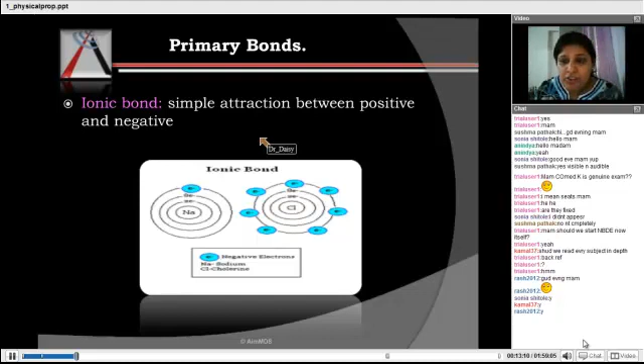Okay. So that is ionic bond. Now coming to the second type of primary bond, the covalent bond. I have already told that any atom is stable only if there are 8 electrons in its outer shell. If you see 2 chlorine atoms, both have 7 electrons in their outer shell. So both are not ready to give an electron because both want 1 more electron to make 8. So what should these 2 chlorine atoms do?

They can share. One is contributed by this atom, one will be contributed by this atom, and these are the shared electrons. So if you count like this, it is 8 for this atom, and count like this, it is 8 for this atom. So sharing of electrons to complete 8 electrons in the outermost shell forms the covalent bond. As these two atoms are sharing, it's very difficult to separate them. That's why covalent bonds are very, very strong primary bonds.

Now coming to the next type of primary bond, the metallic bond. This kind of bond usually exists in metals. That's why the name is metallic bond. In metals, if you see a group of atoms, the electrons don't usually reside surrounding one central ion. Mostly there are central positive ions, and there will be an electron cloud around. So the outermost electrons will be free, surrounding the ions.

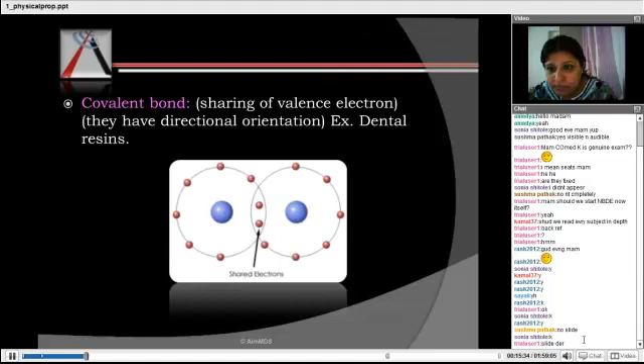No slide? Okay, just a minute. Sushma, can you see the slide now? Kamal, I'll repeat the metallic bond. Okay, Sushma, fine.

So what is metallic bond? In metals, meaning silver, gold, platinum, an atom doesn't exist with the central positive part and its electrons around it. Usually when there's a group of atoms, there will be central positive charges and the outer electrons will be freely moving here and there. So if you see the structure, it will not be a single atom defined like this. Just a minute. So it will not be a single atom defined like this.

So usually there will be central ions and so many electrons around, electrons of this atom, this atom, this atom, all around forming a cloud. So the picture will be like so many central positive ions and so many electrons surrounding them like a cloud. All this cloud will be attracted towards all the positive ions. So that is metallic bond. Kamal, is it clear to you?

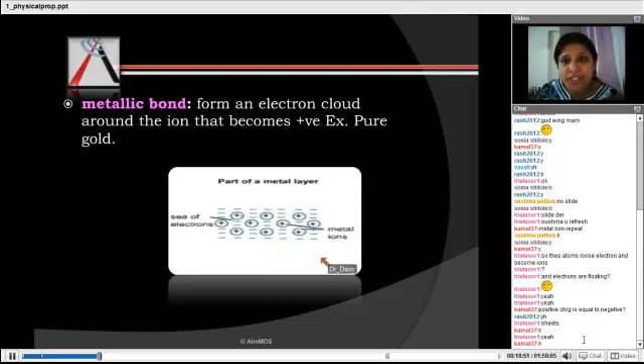So because of this, it can be drawn into sheets, that is malleability and ductility, because of this kind of structure. And it's a good conductor of heat and electricity because of these metallic bonds. Okay.

Then coming to the secondary bonds. Secondary bonds are not as strong as the primary bonds, but these are very important bonds. The first example is the hydrogen bond. So what do you mean by hydrogen bond? If you remember water, in water it is HOH. HOH is the H2O we call it, or HOH, right?

H2O, if you remember, this is H, here is O, and here is H again, right? So this is the structure of water. Because of the different sizes of the atom, oxygen is bigger, H is small. There is a polarity on this molecule. This molecule is polar.

That's why it slightly attracts the next molecule of water, and there will be hydrogen bonding between it. So that is known as hydrogen bonding. You see the structure because of the disparity in the sizes of atom, oxygen and hydrogen. This is a little more negatively charged oxygen pole, and the hydrogen pole is a little positive charge.

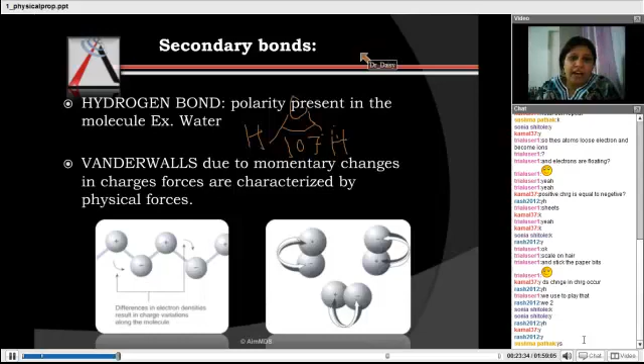Bonds are clear to everyone, I hope. Rashmi, Kamal, Sushma, Sayyad, Saili. Clear? So, shall I move ahead? Next is adhesion and cohesion. Sorry. I want this slide, okay.

So next is adhesion and cohesion. What is adhesion? When the two substances are brought into close contact, molecules adhere with each other. Molecules attract each other and adhere with each other. So when this kind of attraction and adherence is between unlike molecules, it is adhesion, and when it is between the same kind of molecules, it is cohesion. Adhesion when they are unlike molecules, cohesion when these are between two like molecules. Clear? Unlike molecules adhesion, like molecules cohesion.

When we place an upper denture, there is a thin film of saliva between the palate and the denture. That thin film of saliva is responsible for that adherence. So one side is saliva, the other side is denture. So that is adhesion. Adhesion is unlike molecules, cohesion is like molecules.

Two surfaces coming in contact and attracting each other and getting adhered to each other. When these are unlike, then it is adhesion. When these are like, it is cohesion. You should be very clear about this. So the material or film used to cause adhesion is known as adhesive.

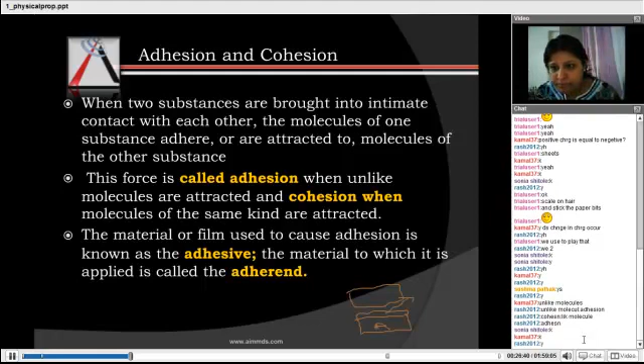Then coming to surface energy. When I talk about surface energy, from where comes this surface energy actually? So just try to understand the concept. This is the one diagram here, in which it's a piece of a material or matter where there are so many atoms or molecules. If this is the innermost atom, this part shown is an atom or molecule which is present very much inside of that matter. So which is present in the center or inside, it will be attracted by all the atoms equally.

Kamal, no audio. Okay, Kamal, you refresh once. Kamal, is it okay? Kamal, is it okay with you?

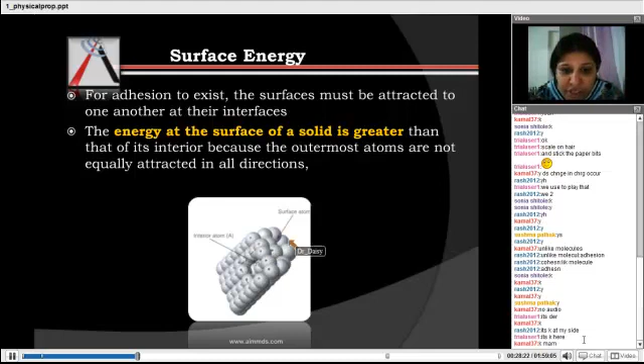Okay, fine. So we were talking about surface energy. The atom or molecule which is present inside, not on the surface, will be attracted from equal sides by other molecules. So its forces or its energy is balanced there. But these molecules which are present on the surface of a matter are only getting attracted from one side, and their surface is free. There are no molecules on the surface to attract them. That's why the energy is high on the surface. So this energy is known as surface energy. So Saili, Syed, Sushma, is it clear to everyone what is surface energy? Okay. Fine.

So what is surface tension now? Increase in energy per unit area. An example for surface tension is if there is one balloon and you blow that balloon, there is increase in area. As there is an increase in area, there is increase in surface energy also, because the surface is increased. As there is increase in surface area, definitely surface energy is also increased. That increase in energy per unit area is surface tension. When the balloon is stretched and you blow it, it is in tension. That is surface tension.

Then a soap film contracts and drop of liquid. One more thing: in this universe, every matter tries to be at the lowest level of energy. Every matter tries to lose energy and be at the lowest level of energy. So how is it possible? It's possible only in the sphere form. For the same volume, there is a rhomboid form, a cuboidal form, a sphere form. Only in the sphere form is the surface area less. When the surface area is less, surface energy is less.

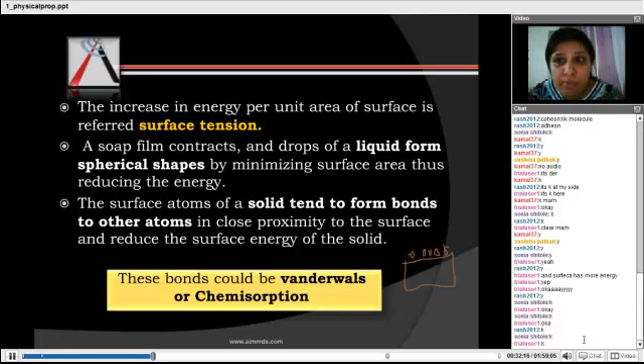Coming to the next topic, that is wettability. So what is wettability? If you put a drop of water on different things, like on plastic or on glass, it has different behaviors. It may not wet the surface, or it may wet the surface.

The better example is mercury. If you put a drop of mercury on a glass slab, it will not form a layer on it, it will get rolled out. If you put a drop of water, it will spread in a better way. So why do few liquids spread on a surface while others tend to form spherical drops? This is related to a property known as wettability.

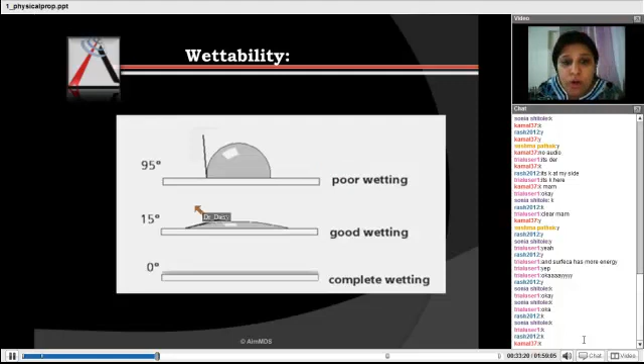So what is wettability? Between a solid and a liquid surface, this is the angle formed. Whatever sphere is formed, if you draw a tangent to it, that angle is considered. If it is more, then wetting is poor. As this angle decreases between the liquid and solid surface, the wettability is improving, it is spreading out. At 0 degree angle, it's completely wetting the surface.

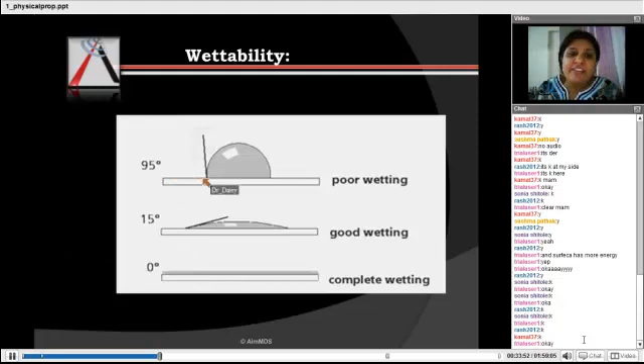So from the MCQ point of view, wettability is best when the angle between solid and liquid surface is 0 degrees. Best wettability is at 0 degrees. It decreases with increase in angle. If this angle is more, wettability is poor. Clear?

So coming to the next part, stress. I hope till here everything is clear to you - Saili, Syed, Sushma, Rashmi, Kamal, everyone. Yes Rashmi, when the angle is 0 degree, it means complete wetting, good wetting. As this angle increases, wettability decreases.

Fine, so I'll continue with the next important property, that is stress. Stress is the force per unit area. So what is force per unit area? Suppose this is one box. If I press it from top, from here, that is the force I am putting on it. Force per unit area is pressure.

So when I am putting force on it, there must be something happening in reaction to that inside this material. Then I am applying that force, and in reaction to that, something will happen in this material. That reaction is stress. Again it is force per unit area, but this is internal reaction to the external force. So this is not force, be very clear about this.

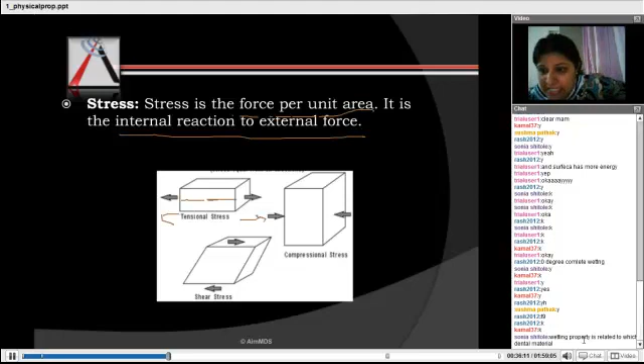Sonia asks, wetting property is related to which dental material? It is related to all dental materials, everything has a good or bad wetting property. Now if you are asking this because of mercury, it's because mercury is very difficult to handle due to poor wetting property. When you handle mercury, it forms little drops, very difficult to handle. So that is because of poor wetting property. That's one application of wetting property with mercury, otherwise wetting is related everywhere.

If I put a drop of water on wood, how much it spreads depends upon the wettability, the angle between the wood and the water droplet. If I put a drop on glass, it's actually related to everything like this. But mainly, mercury has very poor wetting properties, that's why its handling is difficult.

Okay Sonia, fine? So we were talking about stress. When stress is in the same line but in opposite direction, then it is known as tensional stress, that is stretching. So these are the MCQs, be very careful about the definitions, about what actually is tensional stress.

Compare it with compressional stress. If you compare, these two side forces, these two directions of stress, again these forces are in the same line but in opposite direction. Direction of this is this side and direction of that is this side. So when it is in opposite direction but in the same line, that means it is compressional stress.

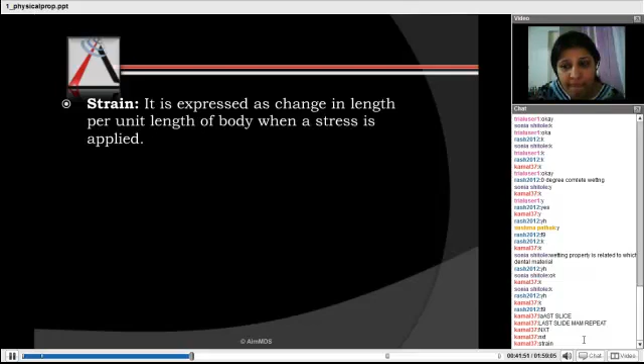There are a few other things which we should know, so please be a little attentive. If we draw a stress strain curve, then what will happen? With some amount of stress, some strain is there, then more stress, more strain, more stress, more strain, meaning more force, more change in dimension. If we take the example of a wire, suppose a steel wire, if we try to stretch it, pull it, to some extent it gets pulled and it will come back to its original position. Till then stress is proportional to strain, meaning you are putting a particular amount of stress and an equal amount, a particular amount of strain is there. Further, more stress, same amount of strain. Same amount of stress, same amount of strain. So that's the proportional thing.

So that is the proportional limit. So if you take the example of a steel wire and try to pull it, then you try to pull it to some extent. When you are pulling it slightly, then a little more harder.

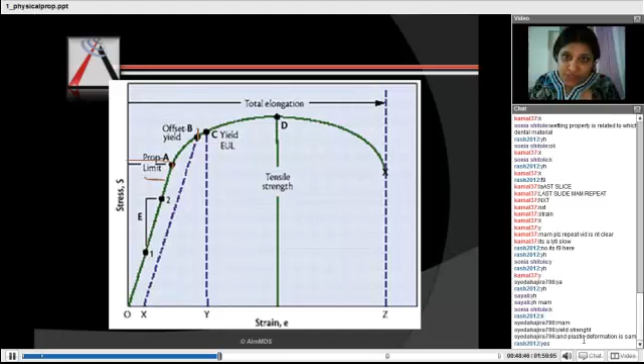At the point of yield strength, plastic deformation begins. Sayyid, is it clear to you?

Okay, so I'll just go again with this. So what is proportional limit? I'll go again to this - maximum stress above which strain is no longer proportional to stress. So till it is proportional, it is the proportional limit. Till it is elastic, it is the elastic limit.

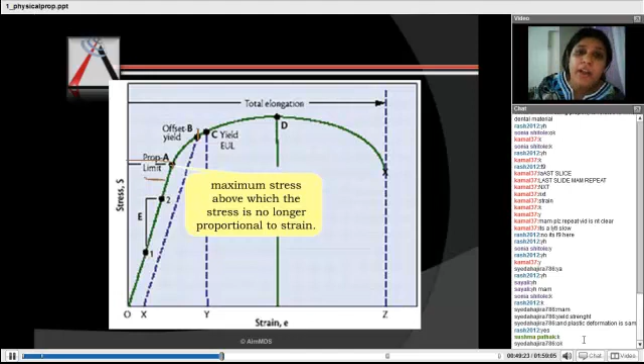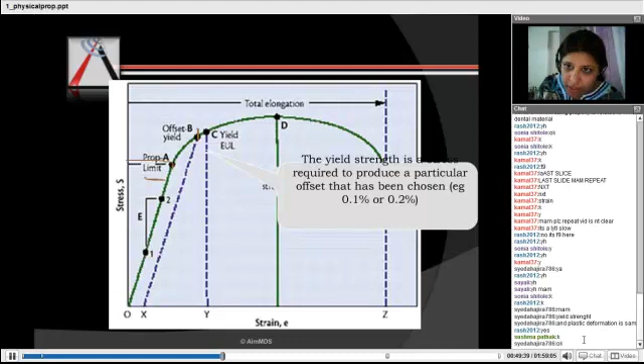When it is not, then it becomes plastic. So what is yield strength here? Yield strength is stress required to produce a particular offset that has been chosen. Okay, so we'll go to the next slide and see how much you have understood this.

Can you all see this box? Yellow box? Okay, so I'll read this and it should be clear to you.

Elastic limit, proportional limit and yield strength have very close values. If you see, elastic limit and proportional limit are identical. Definitely, at the point in which it's elastic, the stress is proportional to strain. So elastic limit and proportional limit are the same, identical.

But yield strength is slightly greater because we have already considered a 0.1 to 0.2% offset. This means the deformation has already happened by 0.1% or 0.2%. So it should be a little higher than the proportional limit, right? So yield strength is generally greater than the proportional limit, a little greater, because of an offset that is chosen rather than measuring the slightest deviation.

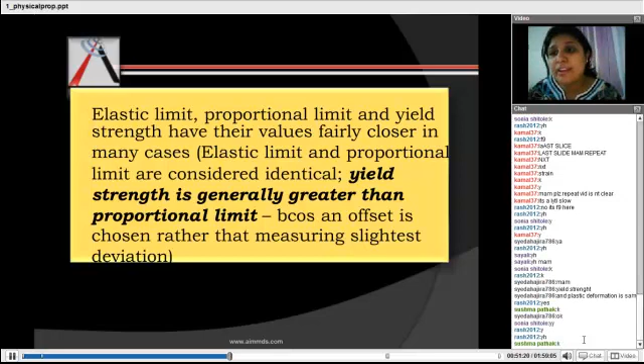So because of the offset which we have chosen. So if these MCQs come, all these things, elastic limit, proportional limit and yield strength, are they the same? Yes, they are nearly the same. But if an MCQ is framed asking which has a little higher value as compared to the others, it is yield strength. So approximately these three are the same, but yield strength has a slightly higher value. I hope this is very clear to you because so many MCQs are there on this. I want this to be clear to everyone, okay?

So here, one thing more I'd like to describe, that is ultimate tensile strength. What is ultimate tensile strength? When we are pulling the wire, it is coming back to its original position. Then we are pulling the wire, it is not coming back to its original position. Its dimension is changing. When you keep on pulling, it breaks. That stress where it breaks is ultimate tensile stress. So what is ultimate tensile strength? Where it breaks, that is ultimate tensile strength. Is it clear to everyone? Okay.

So next is, what is resilience? Resilience is a measure of energy. Again, it's a very important MCQ question. It is the amount of energy. How? When you stretch a wire and leave it, during stretching, how much energy does it absorb? That is resilience. In technical language, it is the area under the elastic region of the curve.

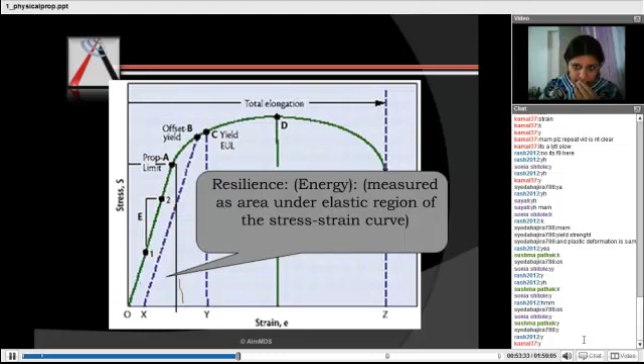Next is, what is toughness? Toughness is another measure of energy. It is the energy required to fracture a material, in other words, it is the resistance to fracture. Means how long a material can resist its fracture, its breaking down. So this is how it is measured: it is the total area under the stress-strain curve.

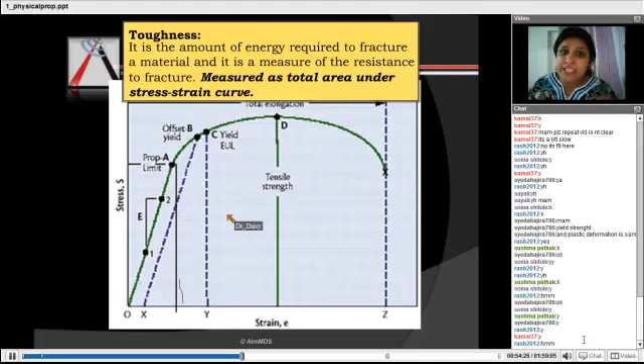Total area means जब तक तुमने खींच के उसको तोड़ नहीं दिया, you are pulling the wire, it's coming back, pulling, not coming back, pulling, and finally it's broken. The whole area under the curve, that is the total energy absorbed before getting fractured, that is toughness. Clear? So what is resilience? What is toughness? Hopefully it is clear to you. There is something more called Poisson's ratio. So I'll go to the next diagram for this.

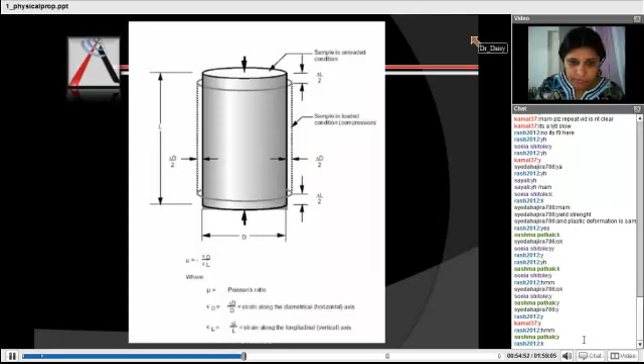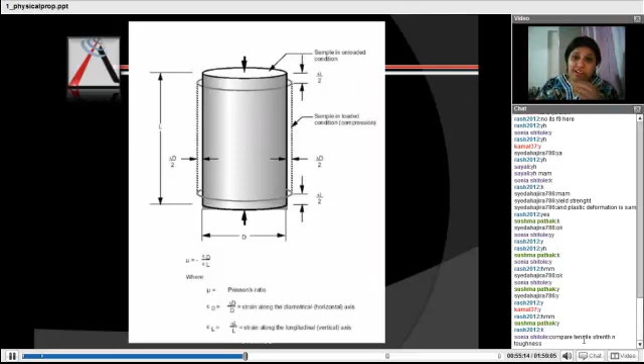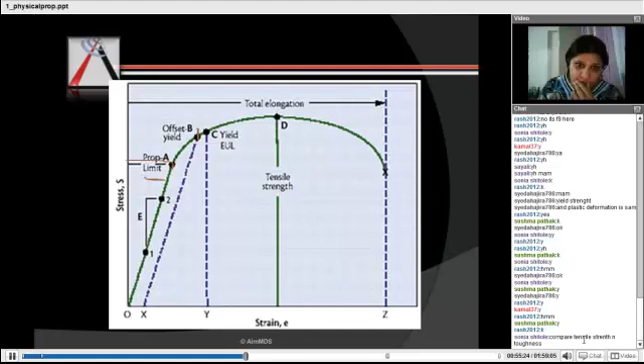This is one cylinder. It is a metal or a rubber or something. When you put any kind of stress on this... here's tensile strength and toughness. Ultimate tensile strength: till ultimate tensile strength, the energy absorbed by the wire. Ultimate tensile strength is when, because of stretching, the wire breaks. Till that point, the energy absorbed is the toughness.

So it's the resistance to fracture, how much energy is absorbed before fracturing, or how much resistance it has given to fracture. It's the same thing to say. Got it? Sonia, the ultimate tensile strength is the last point of the stress-strain curve. उसके आगे तो break ही हो जाता है. So toughness is the total area under that curve up to where it breaks. No, it's not the same. Definitely it's not the same. Tensile strength is stress, toughness is energy.

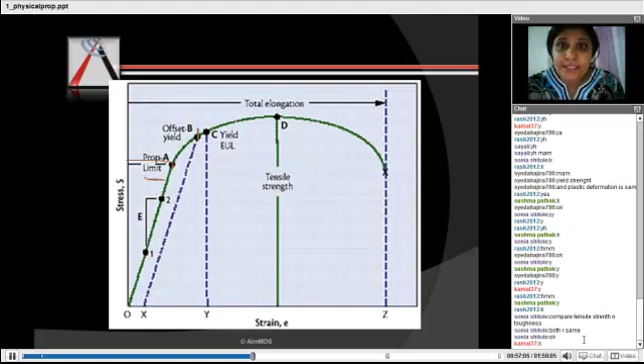You're not getting my point, Sonia. Just try to understand what I'm saying. Ultimate tensile strength is the stress which can cause breakage of the wire. So it is stress. During that pulling, how much energy is absorbed by that wire? That is toughness. The two things are different. Yeah, these are very much related, but these are not the same. So, tensile strength is stress to break. Toughness is energy absorbed before breaking. Sonia, is it really clear to you? Okay.

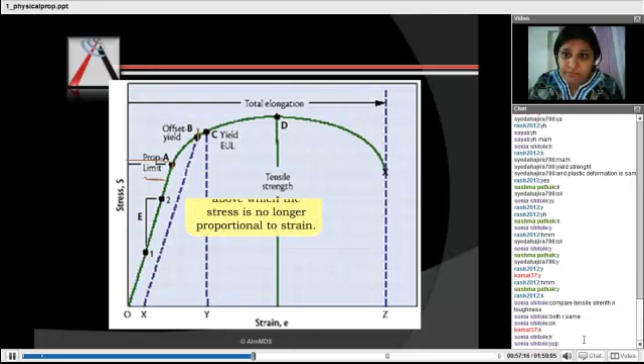Actually, I know you really need to put your brains to understand these definitions, but these are the basics of dental materials, and afterwards these properties will be used many times while defining the materials. So what is Poisson's ratio? When you put a stress over there, there is a strain in all the directions.

Okay. Sorry, my slide is not working. We need to wait for a minute, I think.

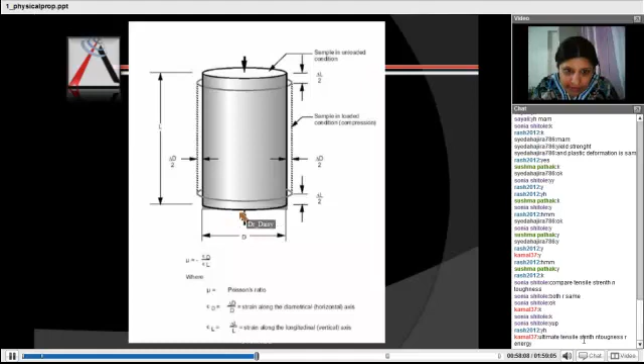Okay. So there is simultaneous axial and lateral strain. Suppose we compress this cylinder. This is the original dimensions of cylinder. We compressed it. There is strain in both directions. See, there is change in length also. There is change in width also.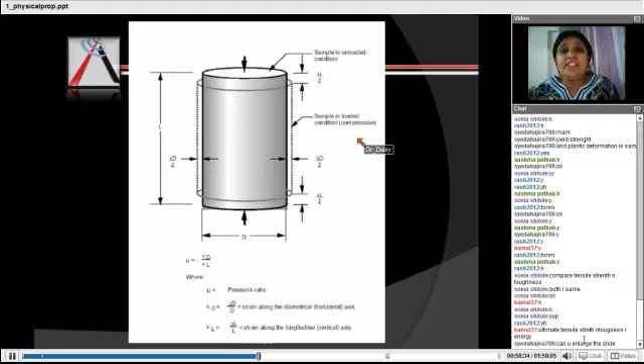So when a stress is applied, the strain is in both the directions, that is axial direction as well as lateral direction. This is the axial direction, this is the lateral direction. So this ratio of that change is Poisson's ratio.

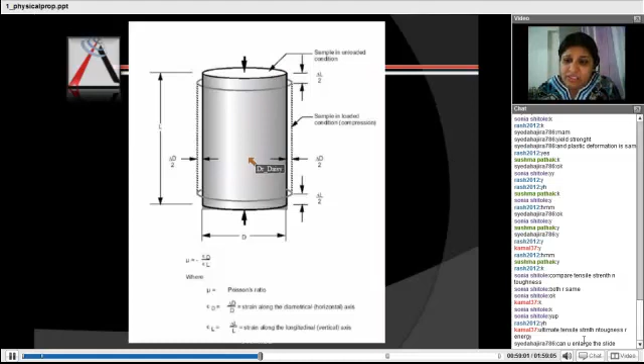Syed, can you and Kamal? Yeah. Syed, can you enlarge the slide? Slide is of full size here with me, Syed. You cannot see this diagram, this cylinder? Syed, can you see this cylinder on which my pointer is moving? For you it is little small. Yeah. So it is small for others also?

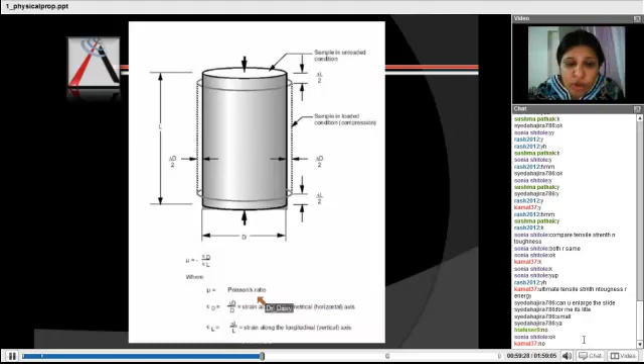See, don't try to read what is written small. I'll be explaining to you. Just look at this diagram, okay, Syed? Just try to look at this cylinder. So don't try to read this, okay?

So what I am telling is, on this cylinder, stress is there. Suppose this compressive stress is there. See, this is this direction, that direction. But change in dimension, that is strain. If you remember the definition of strain, that is change in dimension, it is on both sides. Its length is decreasing, width is increasing. So strain is in horizontal or lateral direction as well as in axial direction, right?

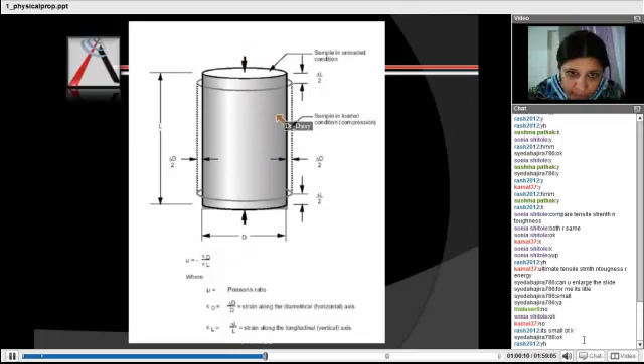So the final sentence which I'd like to give: when there is any kind of stress, the strain is in both the directions, lateral as well as axial.

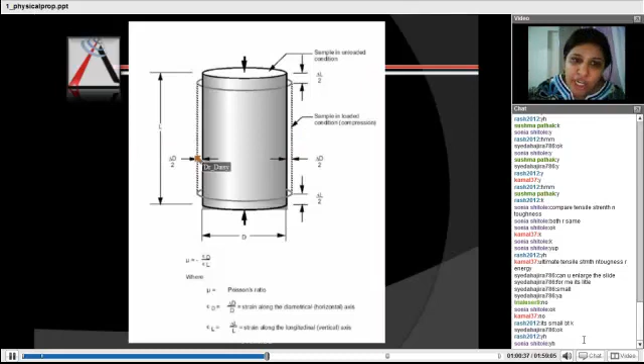So that strain which is in both the directions means the change in dimension is in both the directions. If you take the ratio of both, ratio of horizontal by axial, that ratio is Poisson's ratio. Okay, so the ratio between change of dimensions in lateral direction and axial direction is Poisson's ratio. Okay.

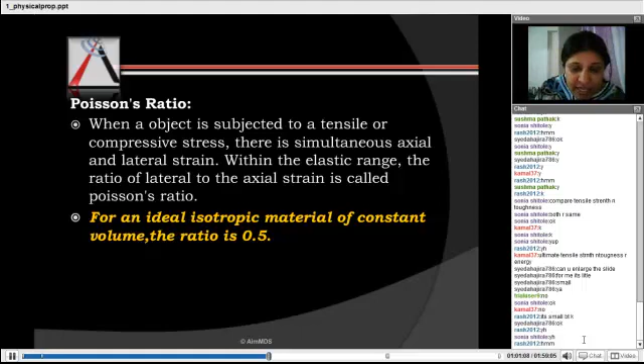So for ideal materials, it is 0.5. So this is something for you to remember. For isotropic materials or ideal materials, it is 0.5. Okay. Till here I wish everything is clear to everyone. Sushma, Sonia, Syed, Rashmi, Kamal, I hope it's clear to you people, right?

Okay, so coming to the next property, that is fatigue failure. What do you mean by fatigue failure? If you remember in the ortho department, sometimes we break the wire, we just hold it with a plier and we keep on moving the other end of the wire. I am not talking about the cutter. If you don't take your cutter to the lab, what do you do?

Ideally the wire should break at its ultimate tensile strength. But because of these multiple cycles of stress, you move it one time, second time, third time, fourth time, it breaks before reaching the ultimate tensile strength. That is fatigue failure. It is because of fatigue of the wire; because you have moved the wire so much, it has broken. So that is fatigue failure.

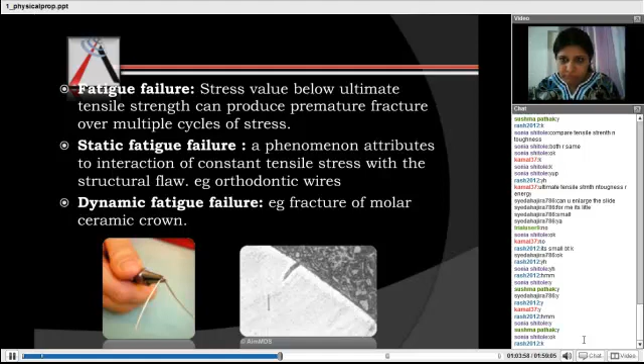Okay, so coming to the next property, hardness. This is very important. So many MCQs come on hardness. In dental materials, sometimes half the MCQs are formulated on the properties only. So hardness is a very important property from the MCQ point of view. It's the index of the ability of a material to resist abrasion or wear. Right? To resist abrasion or wear.

For example, if you rub glass with plastic, which will get abraded? Glass or plastic? Plastic. So which is harder, glass or plastic? It's glass, because glass has a higher resistance to abrasion. It will not abrade easily. So glass is harder than plastic. That's what I was trying to explain with the definition.

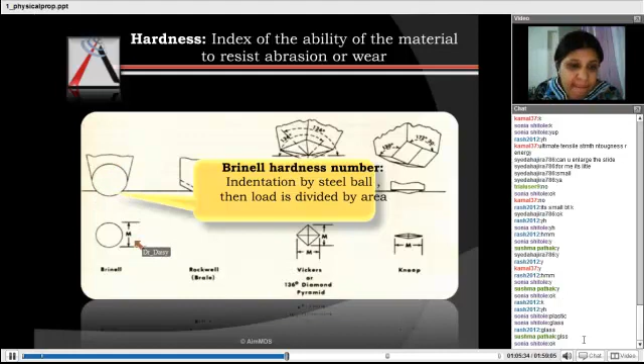Coming to the different numbers, how we measure the hardness of a material. There are different methods, and the first is the Brinell hardness number. A steel ball is loaded on the material. You press the material with a steel ball, and some indentation will be there on the material. The area of that indentation caused by the steel ball is the Brinell hardness number.

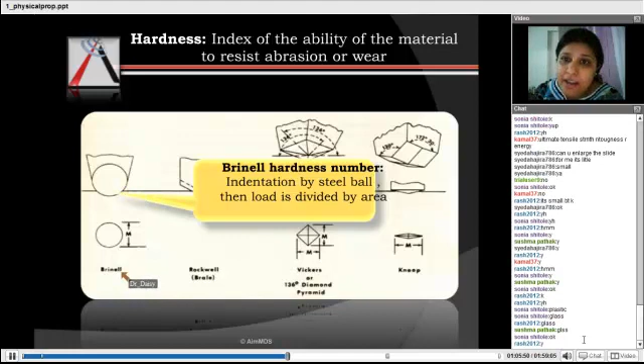The next method is the Rockwell hardness number. Here we use a ball or a conical diamond point. We press it with that diamond point and again an indentation is formed, but here we measure the depth of that indentation. So what's the difference? In Brinell we measure the area of the indentation; in Rockwell, the depth of the indentation.

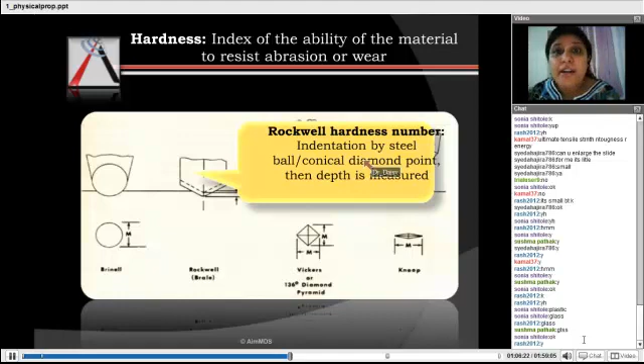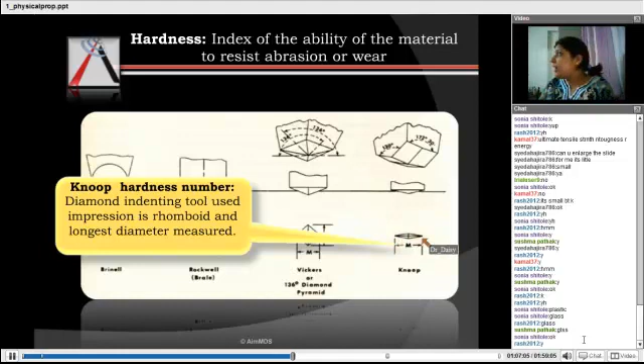Third is the Knoop hardness number. We use a diamond indenting tool which is rhomboid in shape. What is rhomboid? It has two different diameters in different directions. When we cause indentation, it will be of this shape, and we measure the longest diameter of this rhomboid indentation. So the longest diameter is measured in the Knoop hardness number.

Next comes the Vickers hardness number. It is quite similar to the Brinell hardness number. The indenting tool is diamond, a square or pyramid shape, and again the surface area is measured, as we also measure the surface area in the Brinell hardness number.

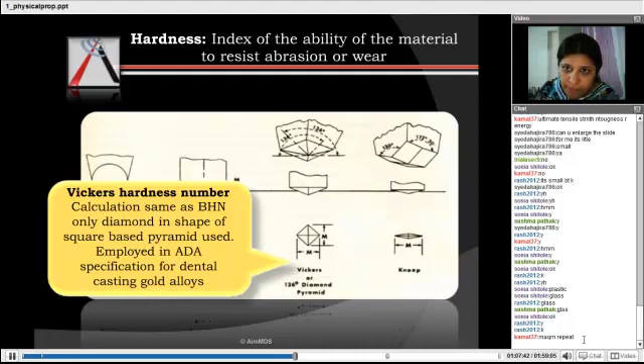So if I like to repeat... oh, what is going on? Okay. Sorry, repeat? Kamal, what do you want me to repeat? All the numbers or some particular number? I am repeating it anyway, for everyone.

There are so many MCQs from this. First was the Brinell hardness number: a steel ball is indented and we measure the area of indentation. Rockwell: a diamond point, and we measure the depth of the indentation. For Knoop, we indent the rhomboid-shaped diamond tool and measure the longest diameter of that rhomboid. For Vickers, a pyramid or square indentation, and we measure the area. So in Brinell and Vickers we measure the area, in Knoop the diameter, and in Rockwell the depth.

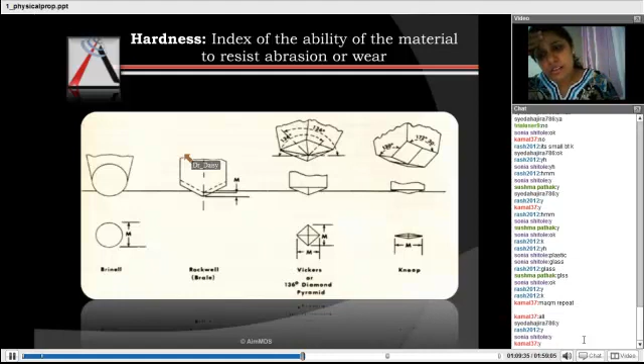Is it clear to everyone, all four numbers? Sure. What about you, Kamal? Is there any doubt? No ma'am, it's not clear. What have you not understood? Okay, I'll repeat for you. Others can also listen. So, Kamal.

If you take any hard surface and press a steel ball on it, there will be an impression of the steel ball on the surface. If we measure the area of that impression, how much indentation is there, that is the Brinell hardness number. Then we take another solid surface and a pointed diamond point and press on it. There will be an indentation again, and we measure its depth. Then it is Rockwell.

The next is Knoop, this last one. We take a rhomboid. You know what a rhomboid is? Two sides larger, two smaller. It's a rhomboid-shaped tool. We press it on a surface, so there will be a rhomboid-shaped impression. We measure the longest diameter, the longest side of that rhomboid. See, here is the longest side. If the mark comes like this, that is the longest diameter.

What are micro hardness tests? Out of this, Knoop hardness and Vickers hardness are known as micro hardness tests. This is again a commonly asked MCQ, which are the micro hardness tests? Out of these 4, Knoop and Vickers, these are micro hardness tests. Why micro? Because the load applied is less than 9.8 newtons. In these two, the load applied is less than 9.8 newtons. That's why these are micro hardness ones. Okay.

Okay, everyone. Now leave that part behind and we'll start with another property. So fresh your minds for the next property, that is color. When we take color, so many things come into mind. Which color? Yellow, red, green, whether it's dark or light, whether it's more green or less green, right? So we can actually particularly define a color. It is defined by Munsell's color system. This system describes a color in a very nice way. It has three components. One is hue.

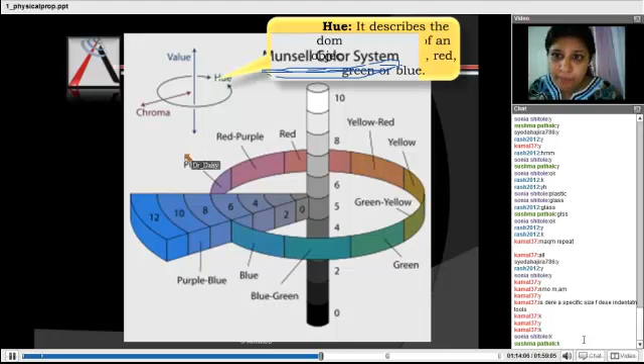In this, hue is this circle. So what is hue? Hue is the basic color. What is the hue of the color? Means what is the basic color? Whether it's red, whether it's yellow, whether it's green. So hue is the dominant color around this circumference, red, green or blue.

Then comes saturation, that is chroma. Chroma is this around the periphery. If you see from this point 0 to 12, this is blue color, right? But 2 is less blue, 4 is more blue, 8 is more blue and 12 is most blue. So how much blue it is? Less blue, more blue. So what is saturation or chroma? It is the amount of color per unit area.

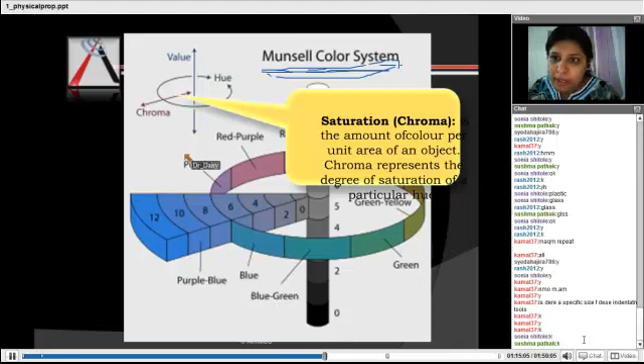So it is the amount of color per unit area that gives the saturation of the color, how much it is saturated with that color. Then comes the last thing, which is defined as the value. Value is around this central axis. It is about the lightness or darkness. If it is blue, is it light blue or dark blue? That will be told by value. When the value is less, it is dark. As the value increases, it becomes lighter. So 0 is the darkest color and 10 is the lightest color.

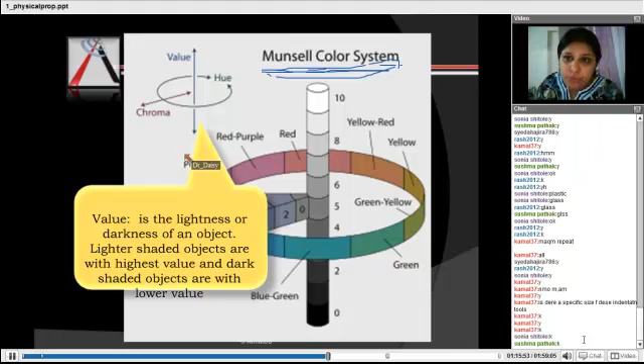As the color becomes light, its value increases. Okay, so that is value. I think this should be clear to everyone. A color can be defined with three properties: hue of the color, chroma is the saturation of the color, and the central axis is about light and dark color. Okay.

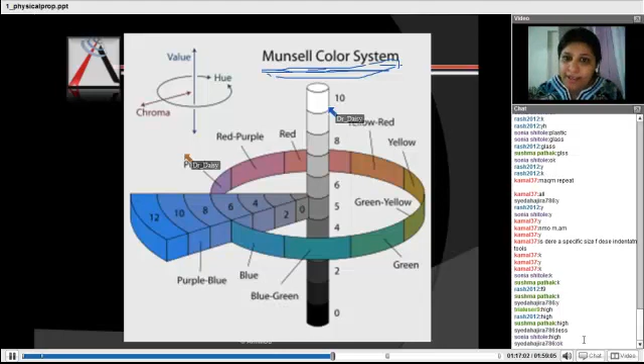A very light blue, does it have high value or less value? You answer me this question, I'll understand whether you have understood this. Its value should be high or less? High. Sushma Pathak high. Sayyid less. Sonia high. Why, Sayyid? See this diagram again. When the color is dark, it is 0. When the color is light, it is 10. It is a very, very light blue, so its value should be high. Lighter the color, value is high. Okay.

So coming to the next property, that is translucency. Translucency is when there is a partial passage of light through a substance, means through an object the light passes, but it's partial passage. It will not give any distinguishable image, but there is partial passage of light. So when there is a partial passage, this property is used for the matching of teeth.

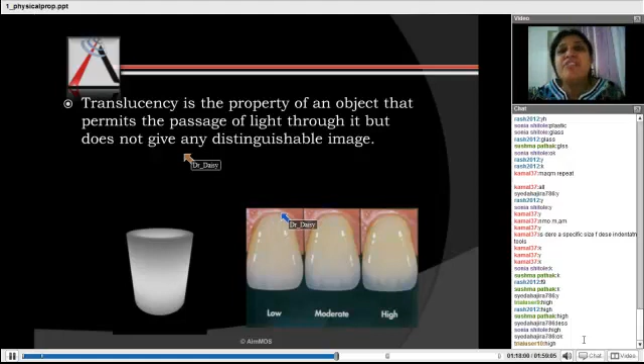In human teeth also there is a partial passage of light through the tooth. That gives a lifelike appearance to the tooth. Because of the partial penetration or passage of light through human teeth, this gives a lifelike appearance. And this we try to match in the artificial teeth. So that is translucency.

Then coming to the next property, that is metamerism. So what is metamerism? It is related to color again. Objects appear color matched in one light. So if you see under one light, you'll see that two objects are of the same color. But when you see under another source of light, the color will start looking different. That property is known as metamerism.

So metamerism is a property when two objects look of the same color under one kind of light, but they look of different color under a second type of light. That is metamerism. Is it clear to everyone what is metamerism?

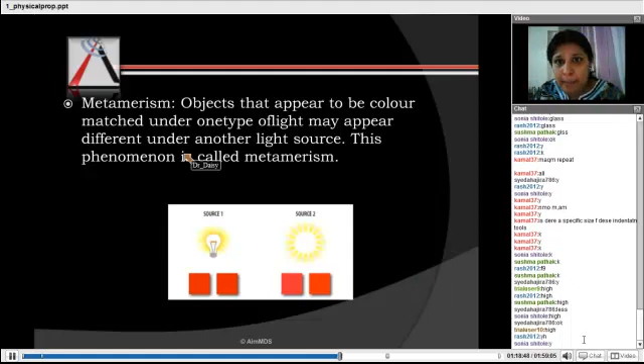Sushma, Saili, keep giving response. Okay.

There's again one or two more things to know. There were MCQs on this. Bezold-Brücke effect. I think my pronunciation is right, otherwise you can see the spelling. Bezold-Brücke effect and the color contrast. So I'll try to explain this. You try to understand, okay?

Okay. Everyone can see this slide?

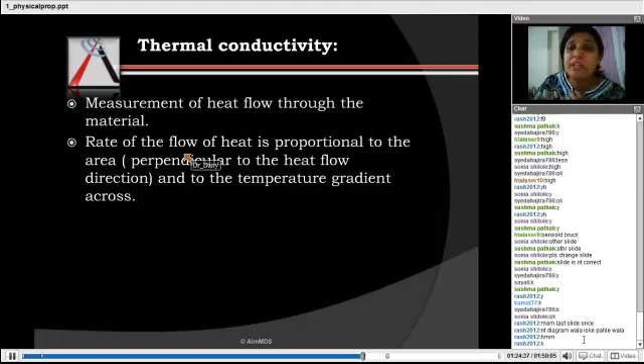Heat flow is proportional to surface area - if the surface area is more, the heat flow is more. Secondly, it is proportional to the temperature gradient - if the difference between the two temperatures of two surfaces is more, the heat flow is more. So heat flow is proportional to surface area as well as temperature gradient. What is important is the coefficient of thermal expansion.

Coefficient of thermal expansion is the change in length per unit length of the original when temperature is raised by 1 degree. When you raise the temperature of a matter, there is a slight expansion of that matter. How much expansion is there, that is the coefficient of thermal expansion.

Suppose you raise the temperature of wood by 1 degree, it will slightly expand. Take a piece of metal, say copper, and raise the temperature by 1 degree - there is a slight change, but copper will expand more than wood. So the thermal coefficient of copper is more than wood. It is a change in length per unit of the original length.

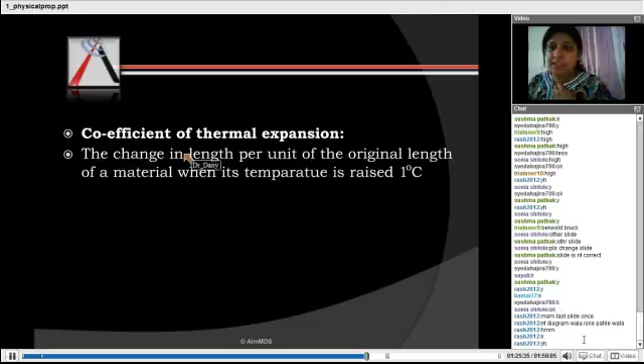So why is this coefficient of thermal expansion important? Because the restorative materials which we put in the teeth should have a very close thermal coefficient to the tooth. Otherwise, if the tooth expands less or more than that, the bond between the restorative material and the tooth will break and there will be marginal leakage.

So MCQs come on this. First we'll talk about this - if you see for the tooth enamel, it is 11.4, meaning it expands more. Dentine is 8.3, meaning dentine expands less than enamel when temperature is changed by 1 degree.

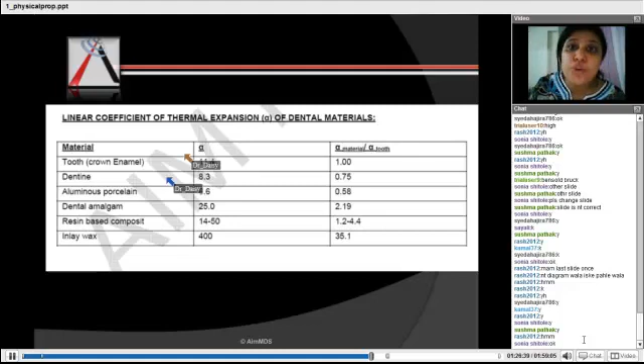Porcelain is very close to dentine. So MCQs usually ask, which material has a thermal expansion coefficient close to dentine? That is porcelain - very close to dentine, 8.3 versus 6.6. Amalgam, being silver, is more - it is 25. Resins are again more. And all the waxes we use have around 400, meaning they expand a lot on heating. So this comparison you should know - which is closer to dentine, which is less.

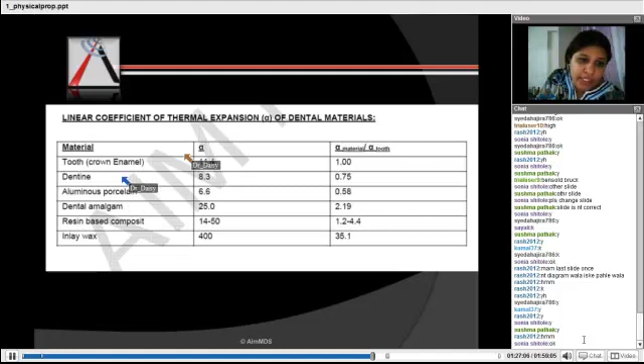So what is the sequence? Porcelain closest to dentine, followed by amalgam, followed by resins and inlays. So all these you should know for the MCQ property.

Coming to the next property, biocompatibility. I'll not go into much detail of biocompatibility. When a material or drug is prepared, it should be biocompatible, right? So there are different groups. Group 1, we check cytotoxic and genotoxic evaluation - on a cell line, we check whether there is any cytotoxicity this product can cause, or genotoxicity whether it can cause any mutation. That is checked in the primary test, or group 1 test.

What is group 2? We check whether it can cause any systemic toxicity to the person - that is checked in group 2. Group 3 is a preclinical usage test, meaning it is used in volunteers and other side effects, its behavior, its serum concentration - all these things are checked. Group 4 is actual usage in the public, and long-term effects are seen after 10-year use in the public. So group 1 is basic cytotoxicity on cell line and genotoxicity for mutation, group 2 is systemic toxicity, 3 is on volunteers, and 4 is in the public.